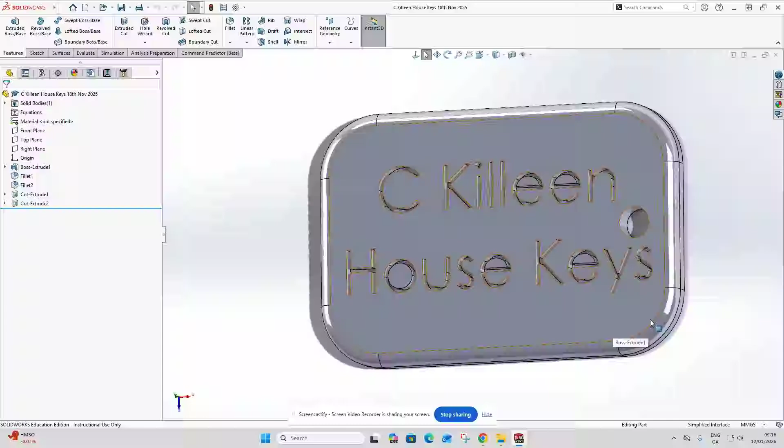Hi lads, so we have created our part there now for our keyring, and I want to convert that into a file that's compatible with our 3D printer.

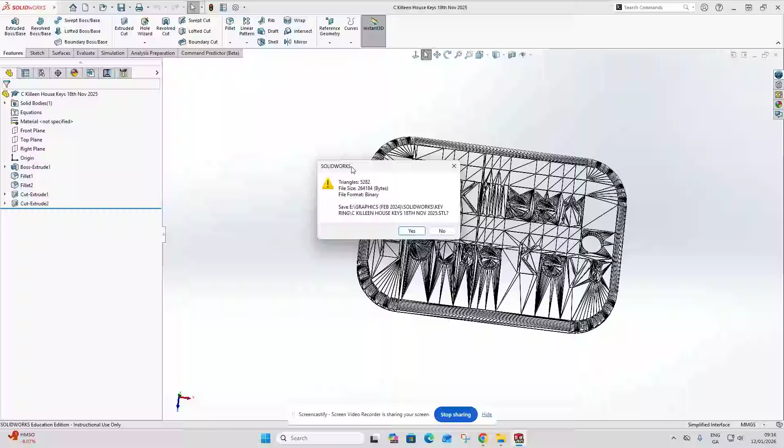So what we do is go File, Save As, and where it says Save As type, it's set as Save As SolidWorks part. We drop down that menu and go right down to the bottom where there's a file type called STL. Click STL, and it's going to save that to wherever the part from SolidWorks is saved, into the same folder. We click Save there as well. When you see these black lines and this little message popping up, you know you're doing it correctly, so press yes, and that's done.

Now our next job is to set up the 3D printer to be ready to take the STL file. So the software we're going to use is a slicing software. It basically takes that part and puts it into layers.

So if you type in Ulti, this will come up. It's loaded on your computer, so double click that and it should start loading for you. Okay, there's a few settings to change here, and you should only have to do these once on the machine you're working on. Click Get Started, click Agree, just click Next. Don't sign in, don't create an account, just click Skip.

We're going to go for a non-Ultimaker, and go to Add Non-Network Printer, then scroll down here for a FlashForge. Now it doesn't let you type it in, so we have to scroll down as far as F. FlashForge, so click the arrow there, and we're going to go to Adventurer 4.

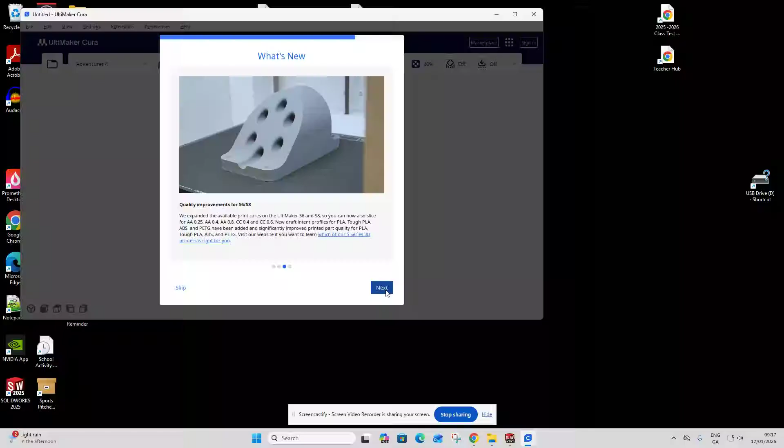Click Next, Next, and Next again, Next again, Next, and Finish. Okay, so there's our screen set up now for our printer.

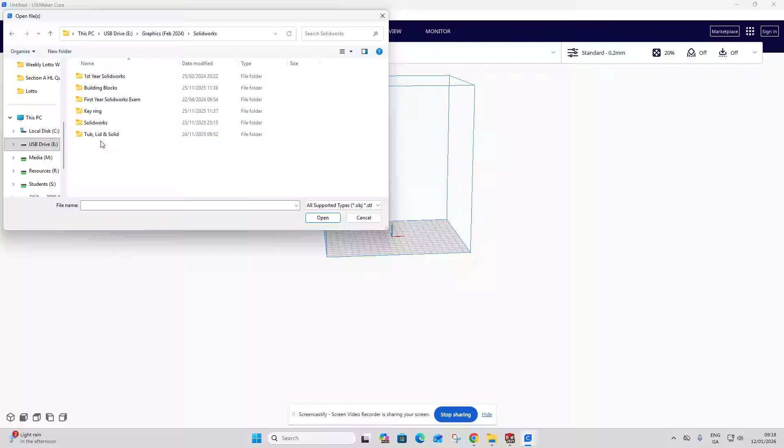Okay, so I'm going to maximize that. Now what I have to do is bring in that file that I created, the STL file. So I go up here to this little folder and scroll to where it's saved. Mine is saved on a memory stick, but you fellas will have yours in your documents. So just give me a moment. And here I have it. That was what I called it, my first name, surname, keyring. Yours will be different. So click Open.

Okay, it comes in like that on its edge. So what I want to do is flatten that down in the bed of the printer.

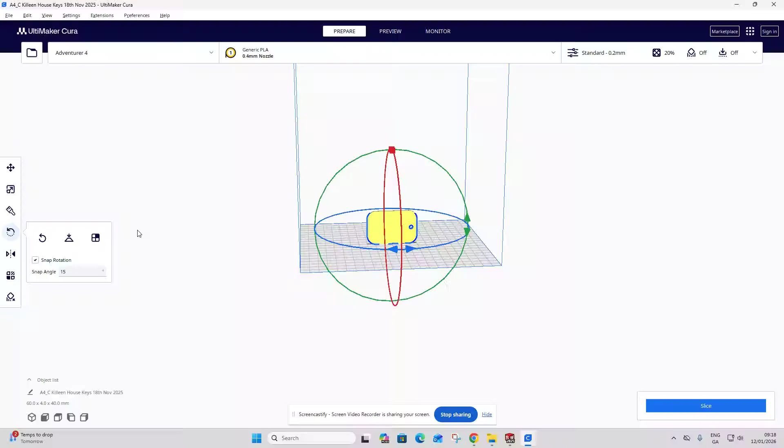So I basically click it and come over here to this one to rotate. If you push down the scroll wheel, if you hold down and left click, it's not like SolidWorks, holding down the right click will allow you to rotate. What you do then is come up to this arrow here, hover around it, and drag it around, the red one. I want to bring it down so it's flat, you don't have to get it perfect. Now if you push down the right click button on the mouse, you can see that's nice and blue.

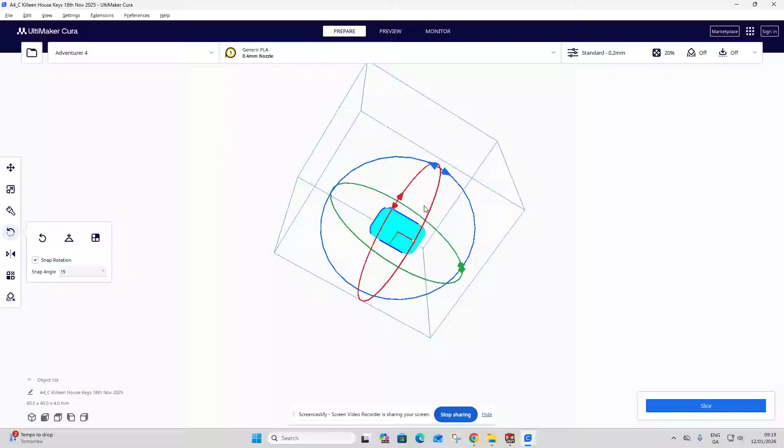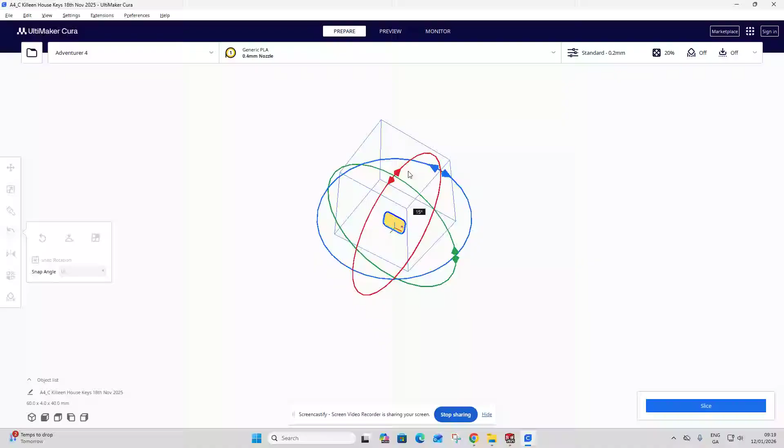Sometimes it's not, so what you have to do is come over here and click this button. If you see any red, I'm going to change that to show you what it might look like. So if I tilt it up anywhere and come back, you can see it's red, and if I tilt it a bit this way again, still red. So if I click on Lay Flat and click it again, you can see the previous one there. I'll do it here again. It's brought it around, it's red. If I click that, it went completely light blue. But sometimes you see a bit of navy on it, click it again and it'll sort that out for you. Okay, so that's basically that.

So I come along here like this, and I have it laying flat, perfectly fine. So what I'm now going to do is come down here, and I don't think I need to change any of these settings. We'll change where it says standard to draft, it'll be a little bit quicker to do it all. So once I've changed that to draft, I just click here on Slice.

And what that'll do is start chopping it up. And that now is going to take 29 minutes to print.

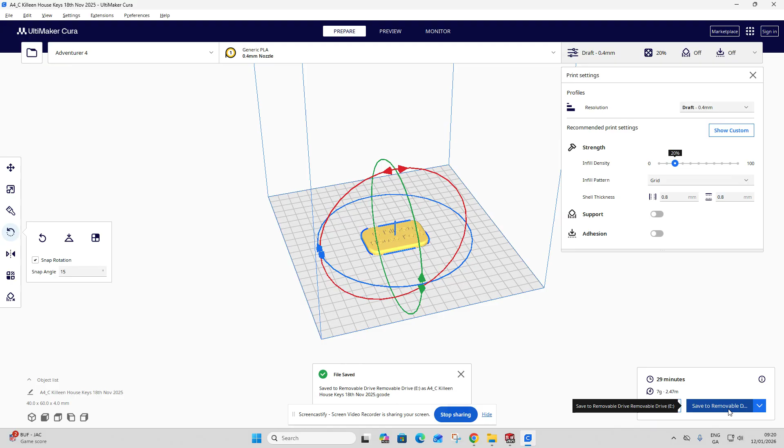You then come down here, get yourself your memory stick, pop it in, and we're going to save that to the memory stick. Mine is already saved there, so you're going to put in your own memory stick and save it to that. Just take note of which memory stick you've saved onto, and that's what you're going to bring to the 3D printer to print off the object. So it's going to take about 29 minutes, so factor that in when you're at whatever stage of the class you're at. Okay.